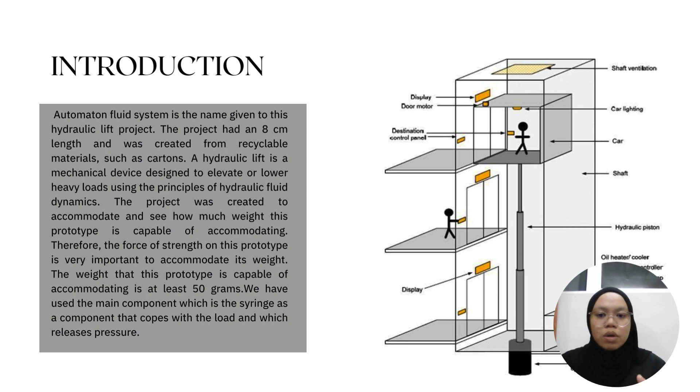A hydraulic lift is a mechanical device designed to elevate or lower heavy loads using the principle of hydraulic fluid dynamics. The project was created to see how much weight this prototype is capable of accommodating. Therefore, the force of strength on this prototype is very important to accommodate its weight. We have used the main component, which is the syringe, as a component that copes with the load and releases the pressure.

Okay, next is the problem statement. We have had problems with the amount of pressure applied to the syringe used for this project. Previously, we used two of the same syringe. It is likely that the pressure is released the same when using two identical syringes. As a result, we corrected the problem by acquiring two different size syringes. This is so that the pressure that is emitted and received will be different.

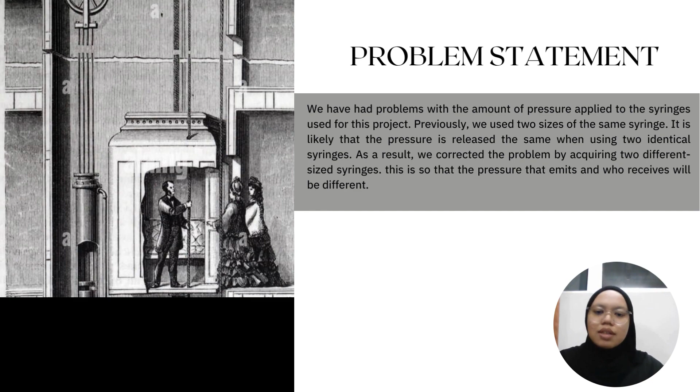Okay, next I will talk about the objectives of this project. First, we are able to learn more about hydraulic lifts and understand them better. Second, this project allows us to learn about Pascal's law and how to apply it. And lastly, being capable of distinguishing between the application of Pascal's law and other laws.

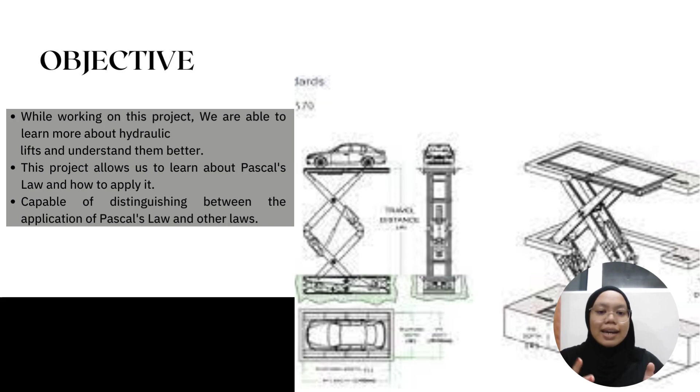Assalamualaikum. My name is Siti Nordini binti Samsul. So I will continue with my part, which is the literature review. First, I found a stabilized finite element method for analysis of incompressible viscous flows using a finite volume formulation. Its objective is to overcome instability and accuracy issues in incompressible viscous flow simulations.

Methodology: a hybrid approach integrating finite element and finite volume techniques. Advancement: enhanced stability and accuracy, addressing spurious oscillations and numerical artifacts. Contribution: notable improvement in computational modeling of complex fluid flows. Impact: provides a foundation for more accurate predictions in engineering and scientific simulations.

Second is a new finite element formulation for computational fluid dynamics. Its objective is developing a robust finite element methodology. Methodology: generalized streamline operator integration. Advancement: revolutionizing fluid dynamics simulations. Contribution: a foundation for future research. And lastly, impact: pioneering advancement in fluid dynamics.

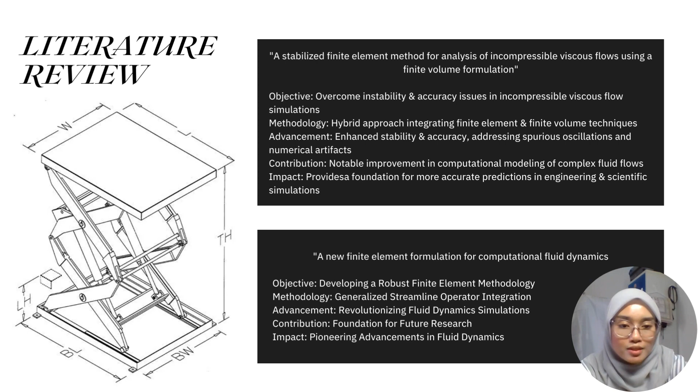Number three is finite element methods for flow problems. Objective: comprehensive understanding of finite element methodologies. Methodology: theoretical frameworks and practical implementations. Advancement: insights into efficacy, limitations, and nuances. Contribution: a seminal resource and catalyst for future research. Impact: a valuable reference for a wide spectrum of flow problems.

Number four is hydraulic design of open channel flow measurement structures. Objective: precision in open channel flow measurement structures. Methodology: a robust integration of theory, empirical data, and practical analysis. Advancement: invaluable insights and guidelines for hydraulic design. Contribution: a cornerstone resource in hydraulic engineering. Impact: indispensable assets for enhancing flow measurement accuracy.

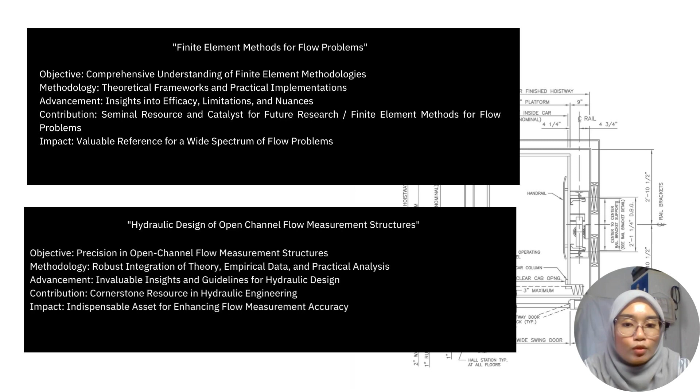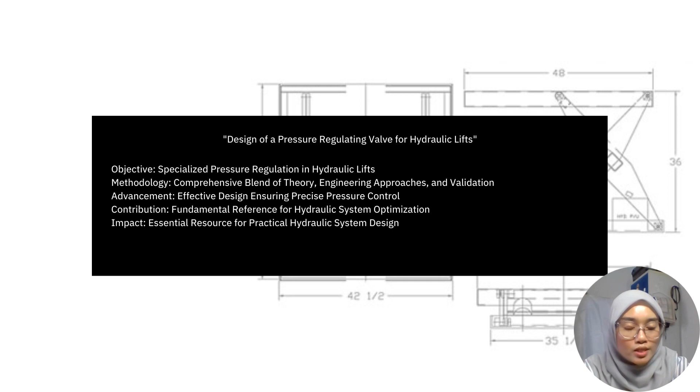And lastly for the literature review, a design of a pressure regulating valve for hydraulic lifts. Objective: specialized pressure regulation in hydraulic lifts. Methodology: a comprehensive blend of theory, engineering approach, and validation. Advancement: effective design ensuring precise pressure control. Contribution: a fundamental reference for hydraulic system optimization. And lastly, impact: essential resources for practical hydraulic system design. So that's all from me.

Assalamualaikum. My name is Muhammad Luqman Hakim, and today I'm going to present the methodology. By combining a cube base with a syringe as the top base, we can create an interesting and visually appealing design for our fluid mechanics prototype. We chose the cube because it provides a stable structure, and the syringe, following Pascal's law, serves as the mechanism for fluid pressure transmission, allowing us to lift a load with hydraulic principles.

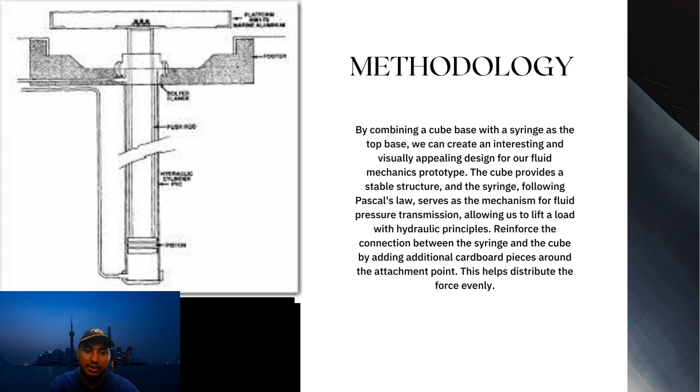We reinforce the connection between the syringe and the cube by adding additional cardboard pieces around the attachment point. This helps to distribute the force evenly. For the design, we made four types of views: top view, front view, side view, and the 3D view. A part or assembly placed on a drawing sheet is represented by a 2D drawing view. An illustration view depicts an object's shape as seen from a variety of common angles, including the front, top, side, and so forth.

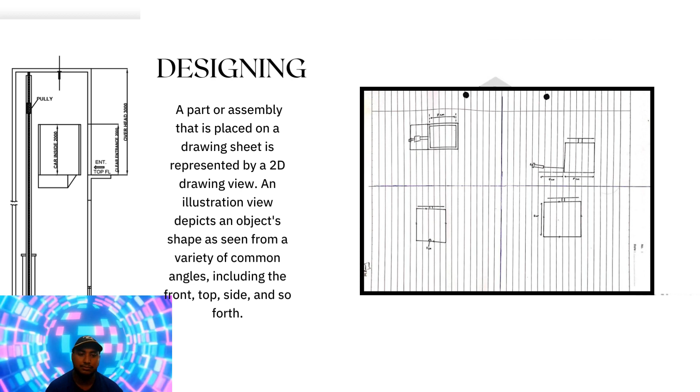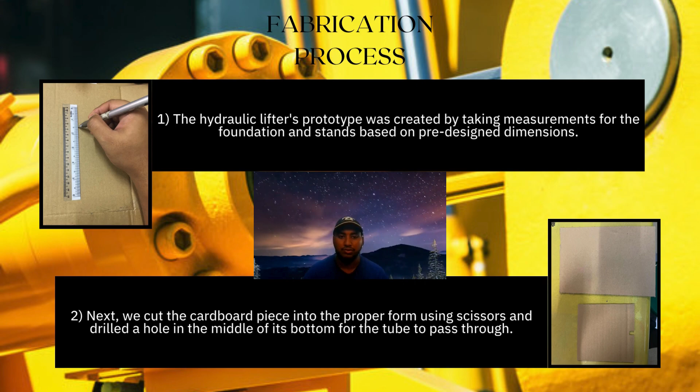For the fabrication process, first the hydraulic lifter prototype was shaped by taking measurements for the foundation and stands based on a pre-designed dimension. Second, we cut the cardboard pieces into the proper form using scissors and drilled a hole in the middle of its bottom for the tube to pass through. The trimmed components are assembled according to the necessary dimensions and based on the blueprint that we have developed. And fourthly, we connected the pieces using a hot glue gun, opting for its strength and ability to provide a clean finish for the final assembly.

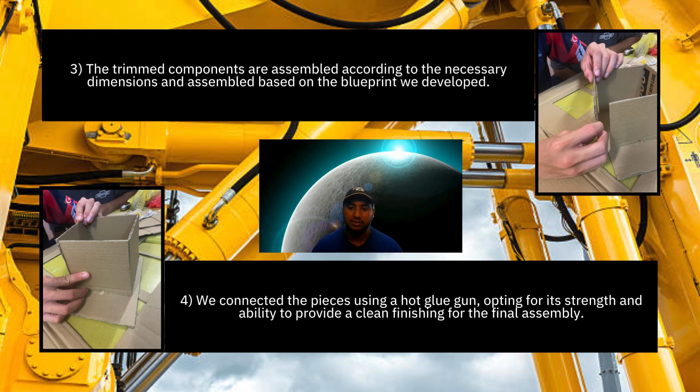After that, the syringe was attached inside the cube, and to establish a suitable platform for our project, we glued the cardboard top base onto the syringe handle, and lastly, we added water to the syringe and tube. The tube functions as the pipe, and the syringe acts as the hydraulic for transferring the medium between the hydraulics.

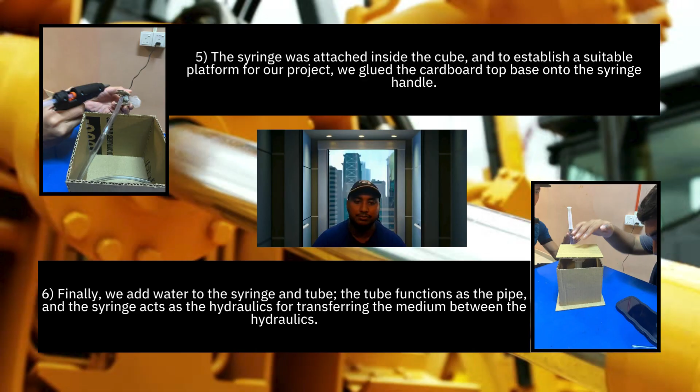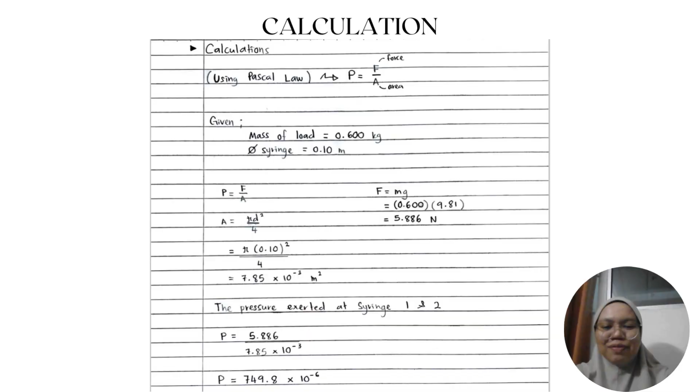For the calculation, we are using Pascal's law. The formula for Pascal's law is pressure equals force per area. The mass of the load that we got is 0.600 kilogram and the diameter of the syringe is 0.10 meter. First, we must find the area. Using this formula, pi d squared over 4, we put the diameter of the syringe in the formula and we got 7.85 times 10 to the minus 3 square meters.

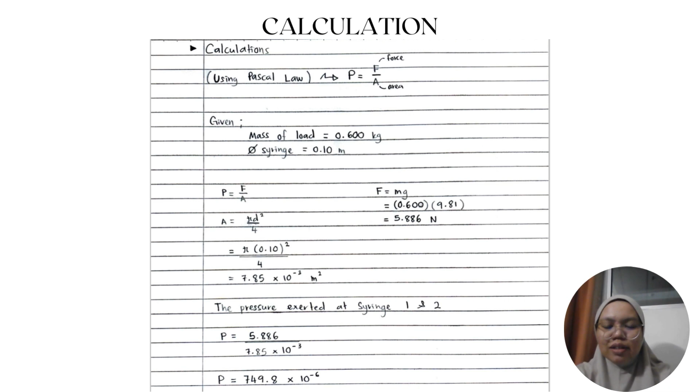And then we must find the force. Force is equal to mg, the mass of the load that we got multiplied by 9.81, and we got 5.886 newton. Then after we got the area and the force, we put them in the Pascal's law formula, and we got the answer 749.8 pascal. Okay, next, let's move to result and discussion.

So in our fluid mechanic lift load prototype project, we built a device that can lift objects using fluid pressure. We use Pascal's law, which says that when you push on a confined fluid, the pressure spreads throughout the fluid. We made a system with syringes to amplify the lifting force. By having a smaller syringe push a larger one, we could lift heavier objects. We chose materials carefully, making sure everything was leak-proof and stable.

Our prototype could lift more than 50 grams, and we tested it to see how much it could handle before breaking or becoming unstable. We measured the input force and compared it to the weight lifted, checking how efficient our system was. We learned that pressure spreads evenly, but there were limits and challenges like possible leaks or box strength.

We compared our actual result with what we expected, finding errors like friction or air bubbles in the fluid. So in the end, we showed that Pascal's law can be used to make a simple and effective lifting device. We discussed ways to make it better and adapt it for different uses. This project opened up opportunities for more research and improvements in design and material.

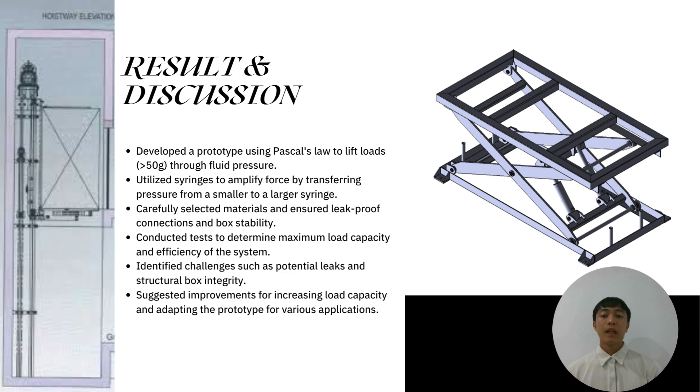Okay, next, let's proceed to improvement. For improvement of our project, we changed one syringe to a smaller size. The purpose of changing the syringe is to reduce the force that we will use later. This is because the area of the syringe is smaller. Previously, we used a 20 ml syringe. For improvement, we changed the syringe to 5 ml.

As for the tube, we shortened the tube from 17 cm to 12 cm. This will reduce the bubbles in the tube and our prototype will work more effectively. Thank you.

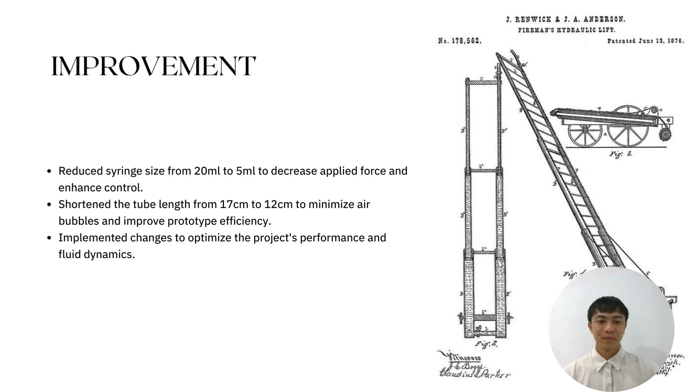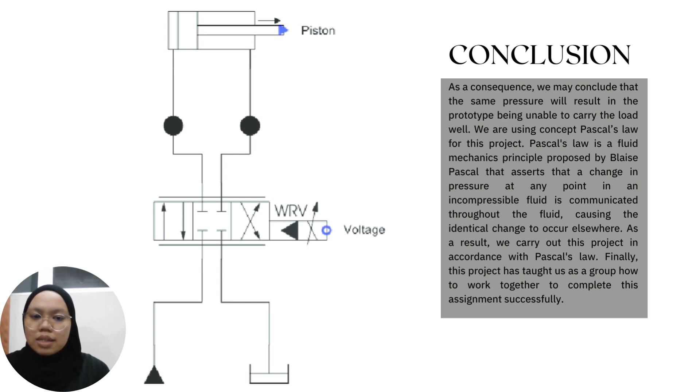Okay, for the conclusion, we may conclude that the same pressure will result in the prototype being unable to carry the load well. We are using the concept of Pascal's law for this project. Pascal's law is a fluid mechanic principle proposed by Blaise Pascal that asserts that a change in pressure at any point is transmitted throughout the fluid. As a result, we carried out this project in accordance with Pascal's law. Finally, this project has taught us as a group how to work together to complete this assignment successfully.